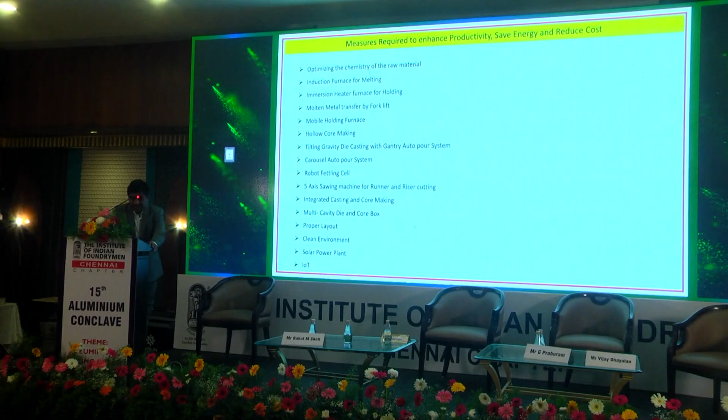These are the essential measures to enhance productivity and save energy. To start with, optimizing the chemistry of the raw material. In the morning session we heard a lot about raw material cost and how to control over that.

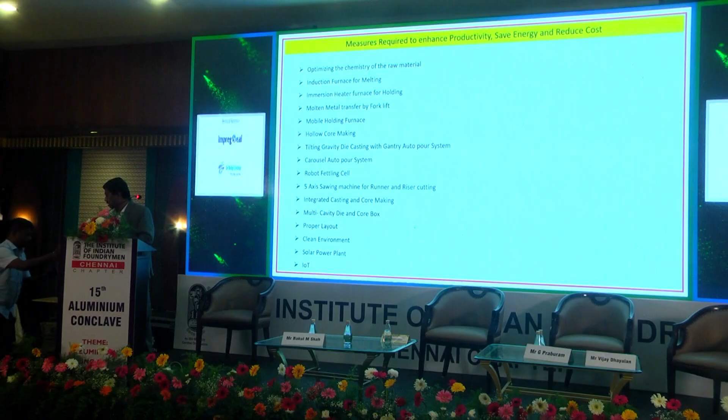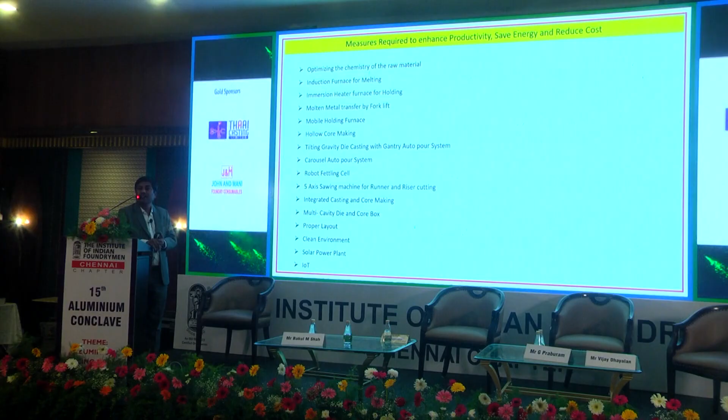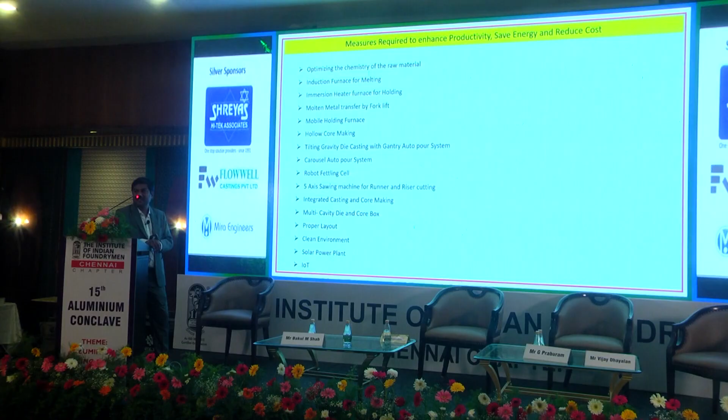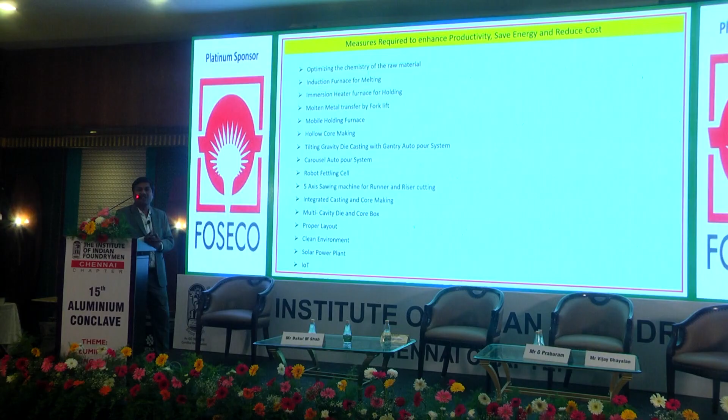So we can do a little bit on controlling the alloy cost. Hope Balu or whoever alloy makers are here will agree to that. Instead of demanding 0.1 iron or 0.2 iron unnecessarily, we can work with additional 0.1 or 0.2 iron content. That will make a big difference in cost, because minimum we can reduce 2 or 3 rupees, or 4 rupees, sometimes depending on the alloy.

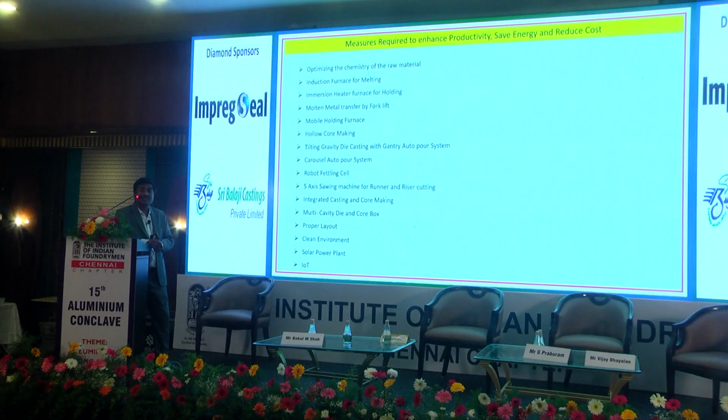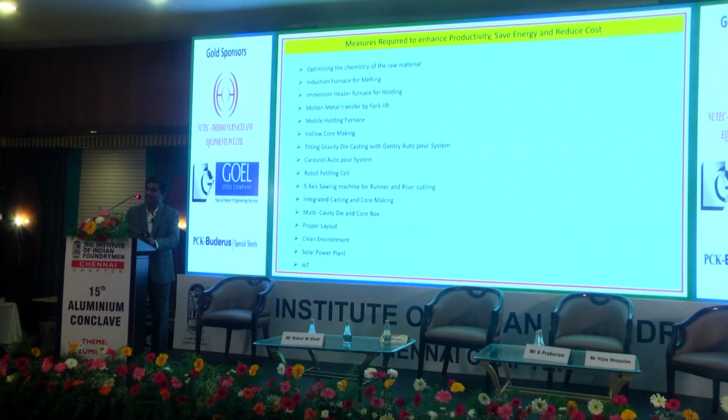So if the casting does not require any leak testing or load bearing strength, we can easily choose and customize the alloy. We can even convince our customers, as long as they get what they want, like the properties or leak proof requirement, then we can easily do that and enjoy the benefit out of it.

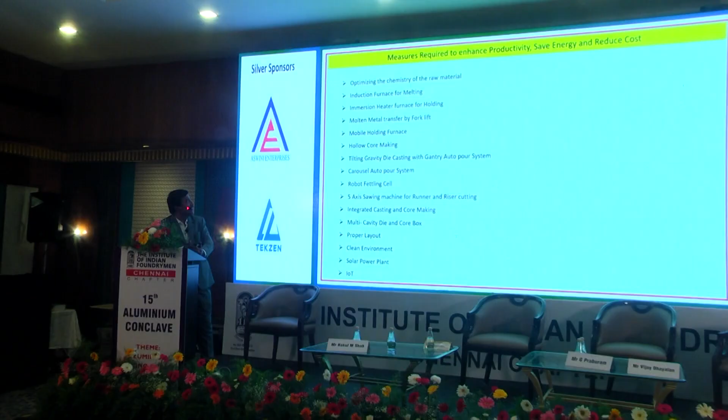Second is induction furnace, immersion heater, molten metal transfer, and we are going to touch these in the coming slides. Hollow core making, tilt gravity.

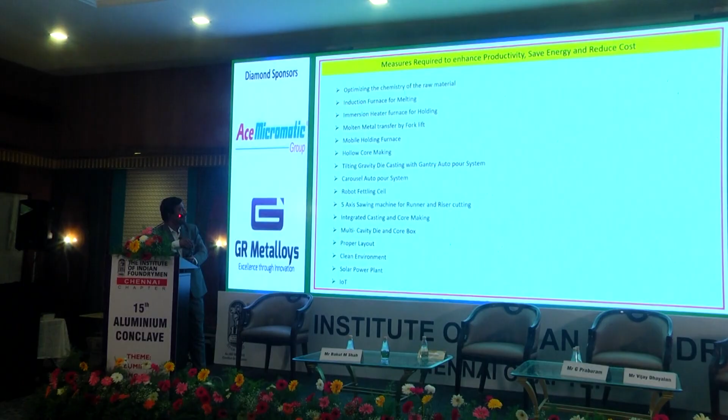First, we should think about eliminating the diesel fired or oil fired furnaces from the foundry. Personally I've been using it for more than 30 years, or 28 years, induction furnace, but considering all issues, initial cost will be little higher, but there's long-term benefit. There are many benefits when we use induction furnace: efficient, clean, safe, eco-friendly, and we can easily get it adopted for Industry 4.0.

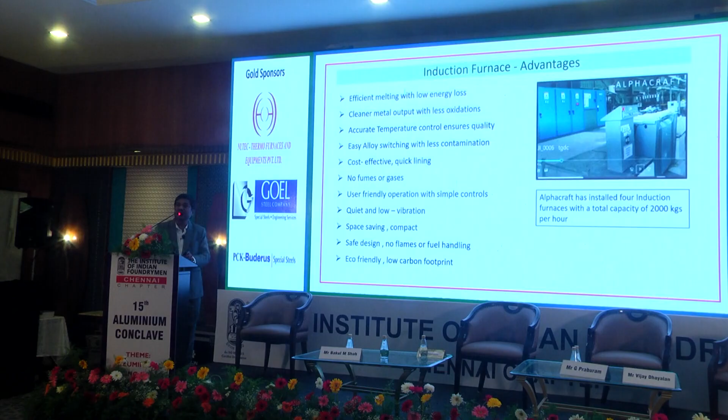We will get a very clean metal with less oxidation. One of the biggest problems causing many defects is unclean metal or the quality of the metal. The quality of the metal contributes around 70 or 80% of the defects.

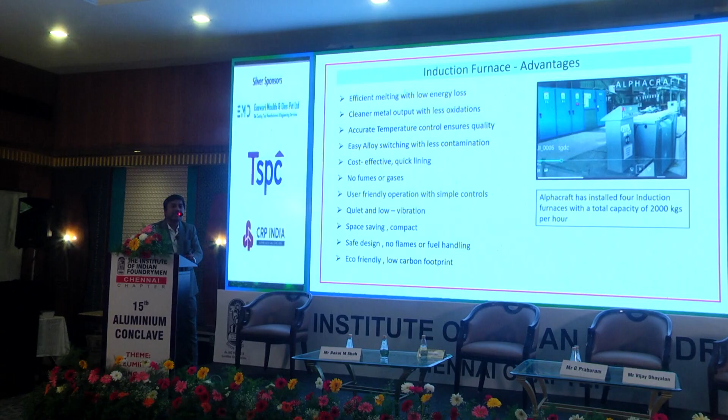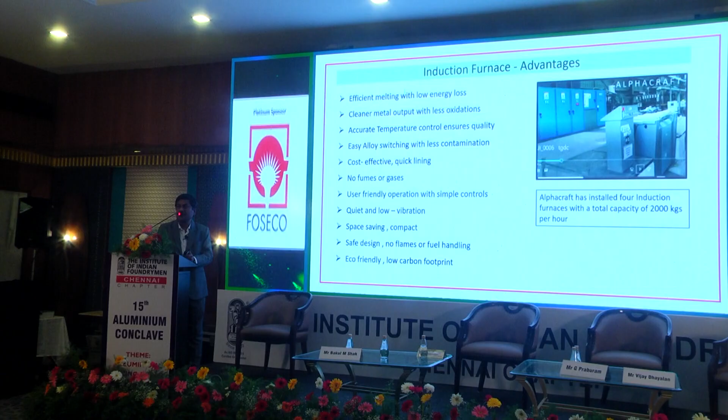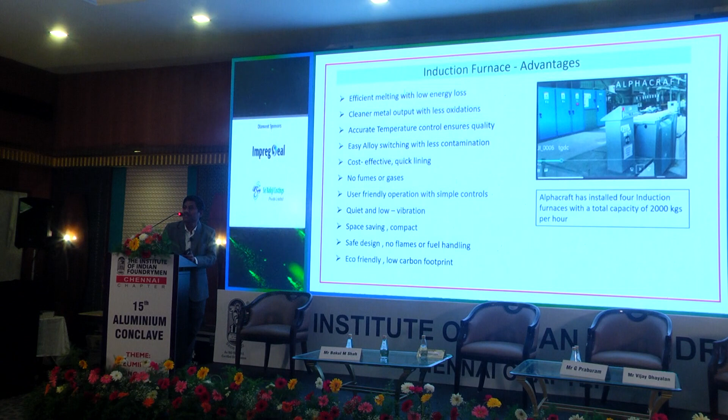When we use the induction furnace, we will have accurate temperature control. Whereas with a tower melting furnace or any other furnace, it's very difficult to change alloy; we'll have to have a furnace for each grade, one furnace for aluminum silicon, and then another furnace for aluminum silicon copper, because we cannot remove the entire metal from the tower melting furnace or other furnace.

Whereas here it is very easy to remove the entire metal. We can tilt and then clean, and then charge whatever grade we want. So the contamination will be very less.

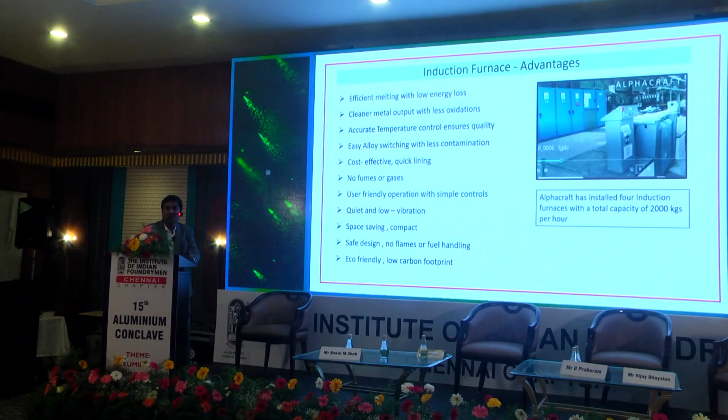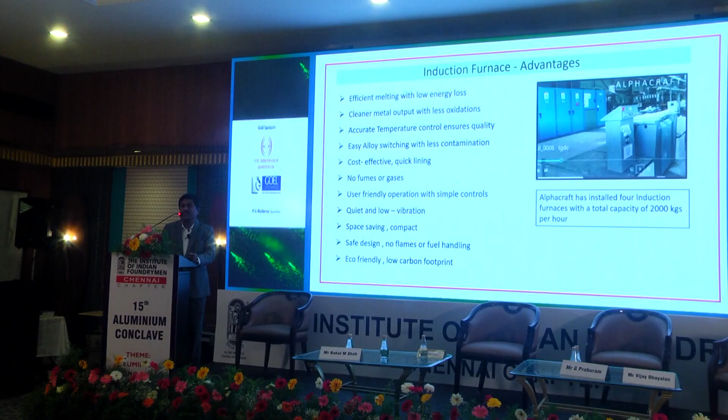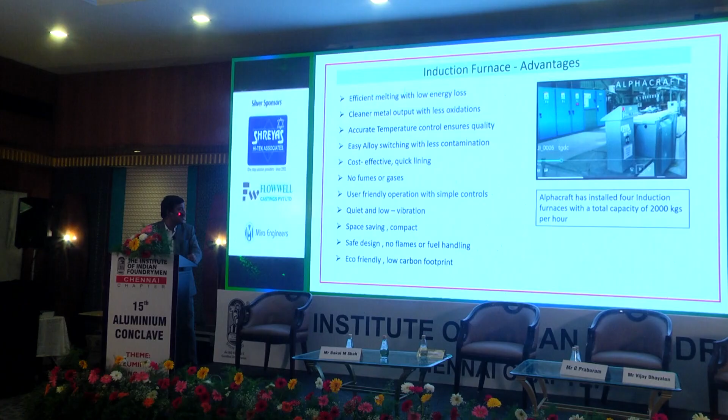If you compare the cost of diesel, furnace oil, or any other LDO, the cost will be less when you use an induction furnace. No gas, you can have a very clean foundry, and it's very user friendly. One of the biggest advantages is even if the furnace is 250 or 350 kilowatts, we can operate at even 10% of the power. When we don't want to tap or increase the temperature, if we have to hold it for some time due to some reasons, we can easily bring down the power and operate it. It's very quiet, low vibration, space saving, no flames, and has a low carbon footprint, which is required.

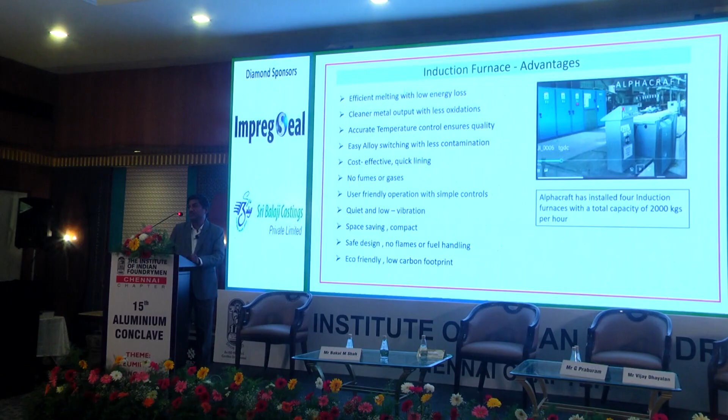In Alphacraft, our company, we have installed 4 induction furnaces, with a total capacity of 2000 kgs per hour.

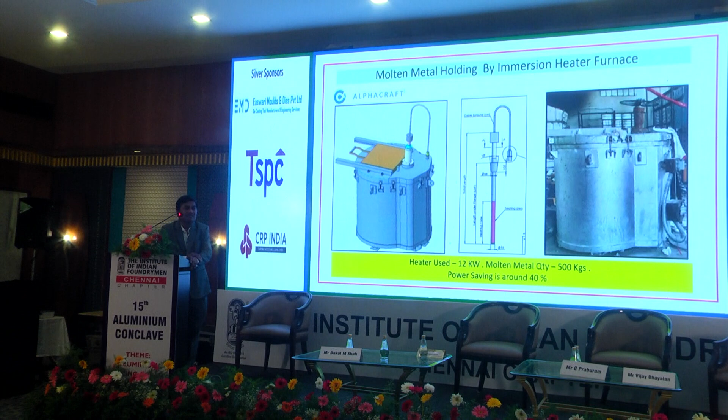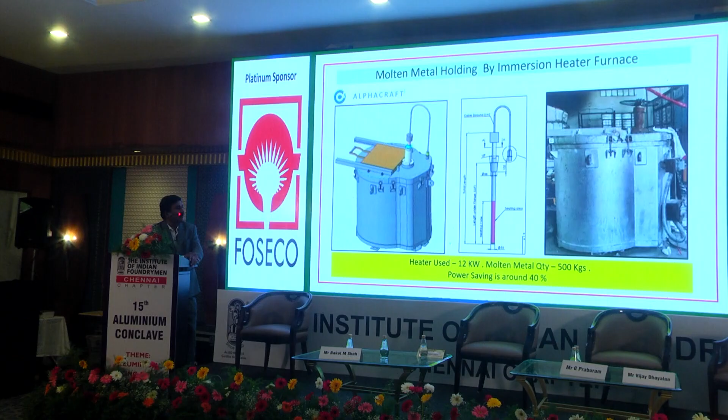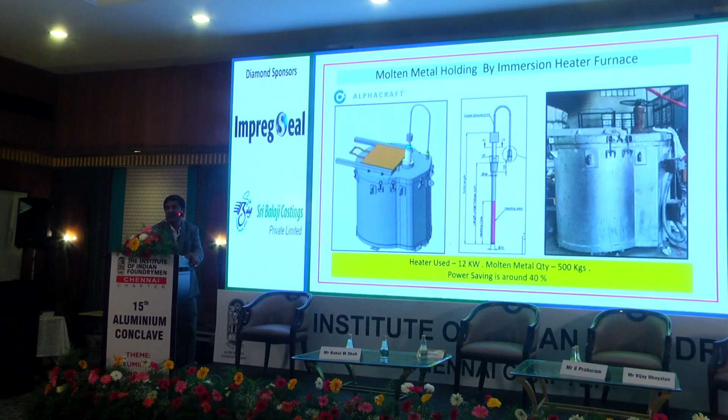We tried with an immersion heater. The picture on the right is the furnace built by us, and we imported an immersion heater from Denmark. We are trying to source it locally—if someone can help us, it would be great. We developed only one so far, and we have 18 furnaces, so we'll have to slowly replace them all with this, and the energy efficiency is quite high. For 500 kg, we require only 12 kilowatts, because there is no crucible—we put the heating element directly inside the molten metal, so the energy loss is very minimal.

So in each slide, I have addressed productivity, cost saving, and energy saving.

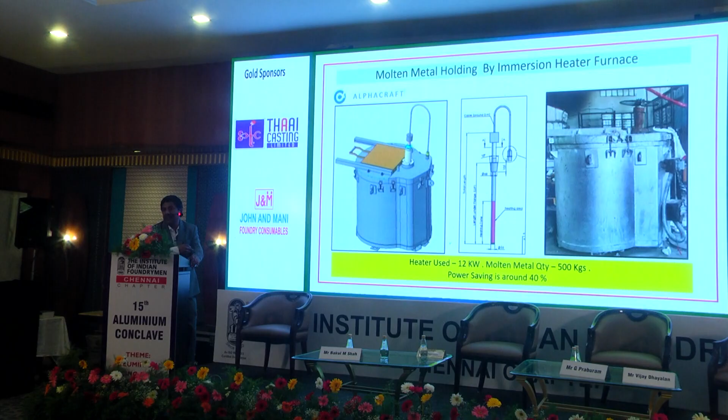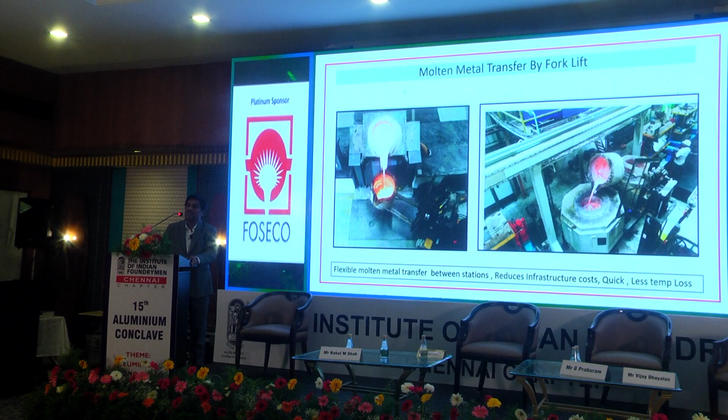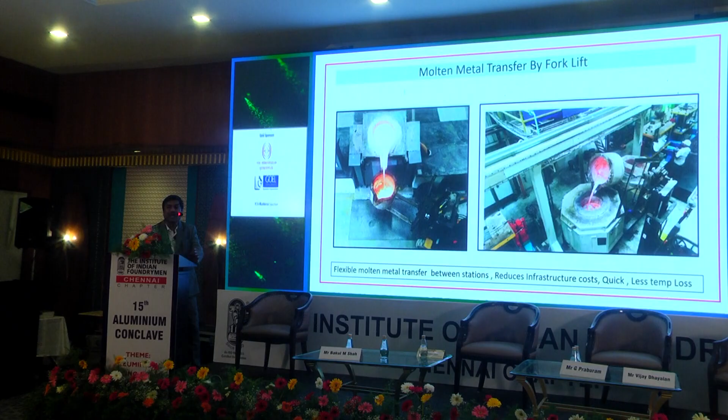For mass production and to achieve productivity, we should try to use a forklift, which is cost effective and saves a lot. You can move from one station to another without much hassle—directly tap molten metal into the ladle and move to your pouring stations, and only one person is required. We don't need to deploy 2 people to transfer molten metal from melting to holding, because you can have a tilting arrangement in the forklift itself.

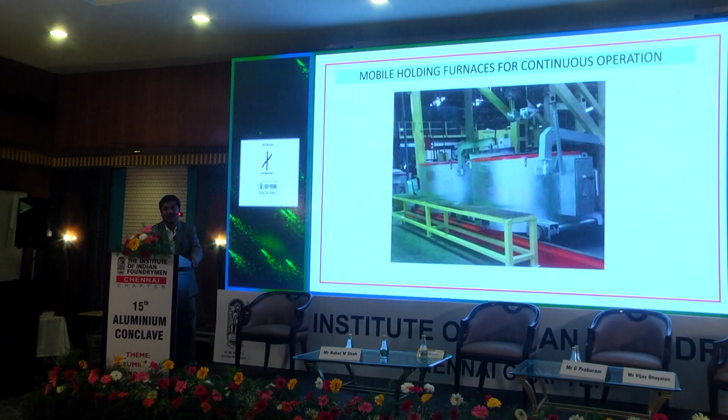For continuous operations, you can build the furnace with wheels, and have 2 furnaces in case you don't want any interruption during production. This furnace was built by Praveen's father, and we deployed it in a carousel auto pouring line—you can move it even by hand or with a motorized one. So production will not get affected at all.

Nowadays we stopped doing all the treatment in the holding furnaces. We treat the metal in the transfer ladle itself and then transfer the treated metal to the holding furnaces. But in case you are forced to do the treatment in the holding furnace, you can have this arrangement, and it will help a lot.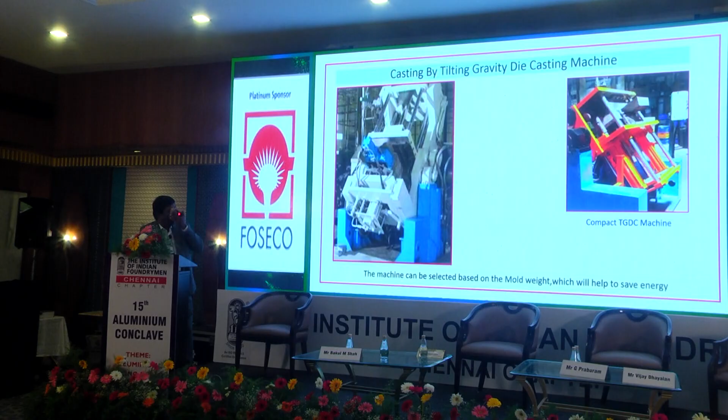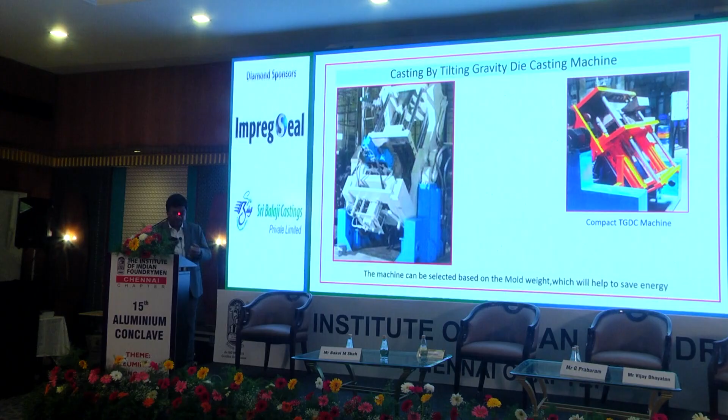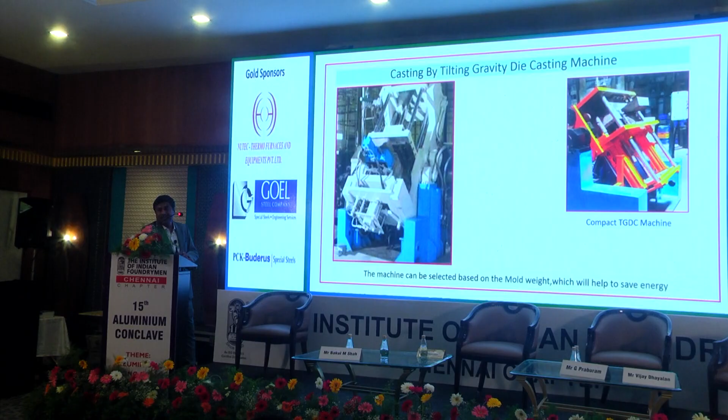When it comes to casting, whoever is using standalone equipment, we can go for a tilting gravity die casting process. There are many machines available in the market, and we can choose accordingly—no need to buy a bigger machine and end up incurring huge power costs. We can choose according to the mold weight and the casting weight.

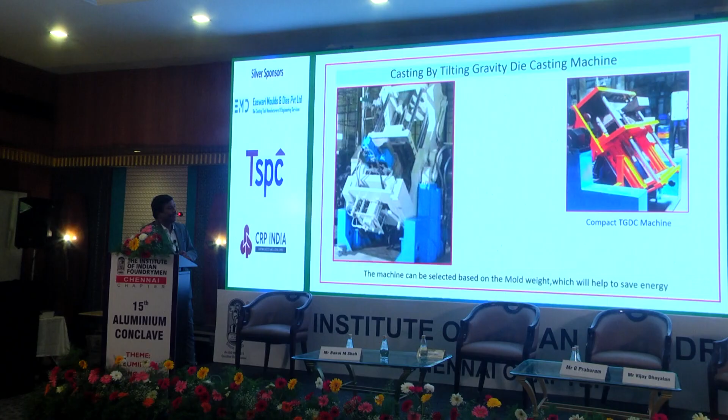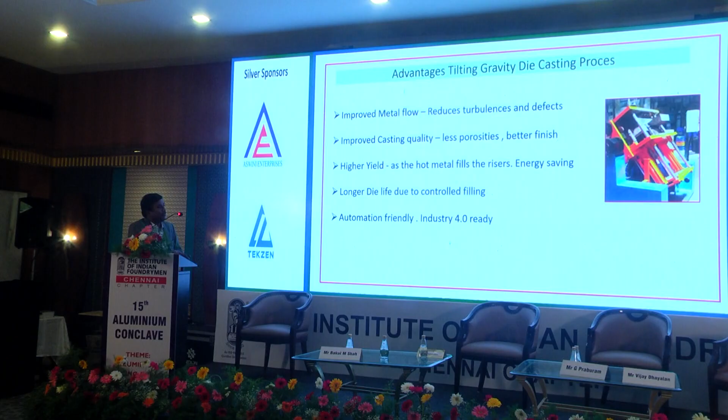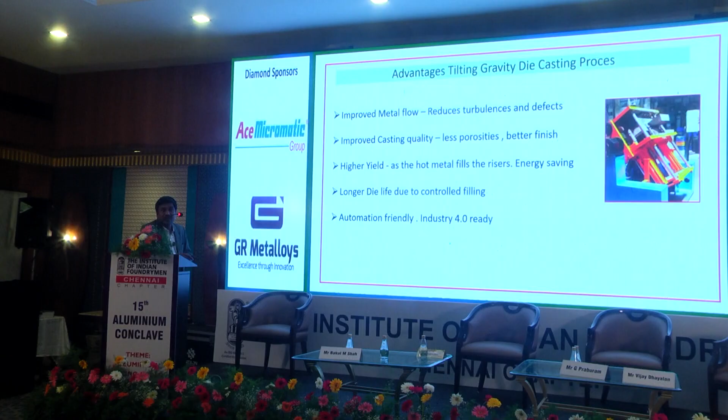See the advantage of the tilting gravity die casting process: improved metal flow, reduced turbulence and defects, improved casting quality, less porosity, better finish, higher yield compared to standalone, and longer die life due to controlled filling. It's automation friendly and can easily connect to IoT.

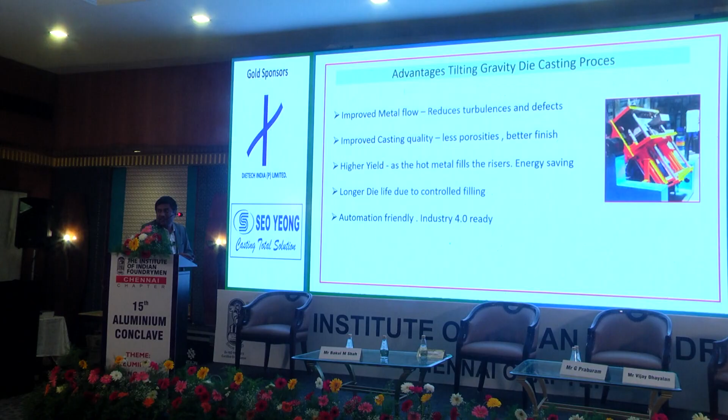So another option for mass production - we'll play a video. We can go for a gantry operation. It's a very low cost automation, and later we move to a fully CNC controlled gantry auto pour system.

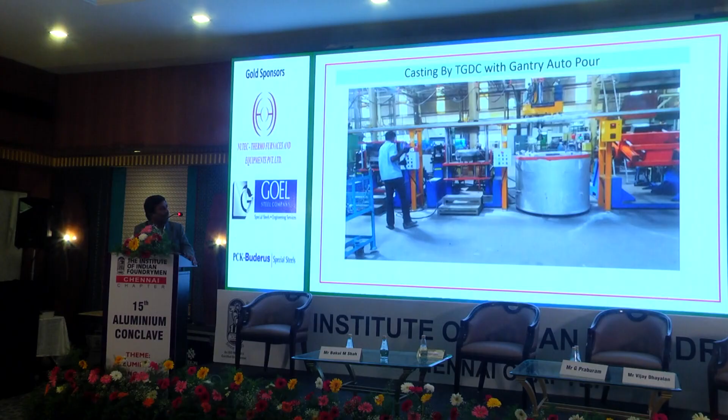By having this setup, we can reduce the manpower requirement. And by having this arrangement, another thing is we can have a common power pack - we don't need an individual power pack for each machine. For the second, third and fourth machines, we designed a common power pack with 2 hydraulic motors and pumps. So the energy saving is again very significant.

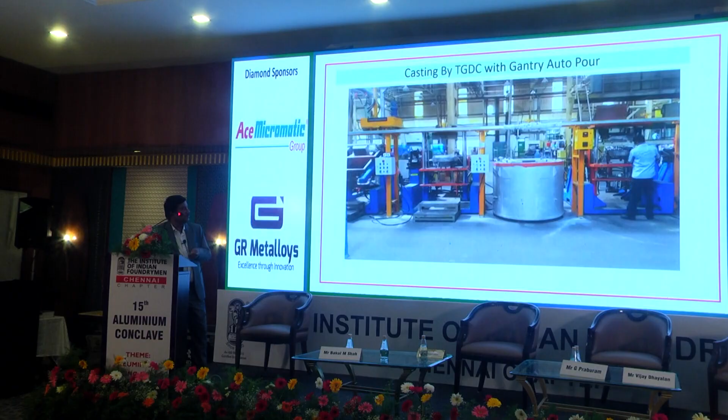This is the latest gantry auto pour system with 2 furnaces in the middle and 4 TGDC machines on either side. Here you can vary the weight of the metal as we like, and we can even handle 2 grades of metal in this same line.

Suppose if we need, for example, one grade like AC4B for the first 2 machines, we can fill that AC4B in the first furnace, and if we want something else like LM6 for the other 2 machines, we can fill the LM6 in the second furnace. The whole gantry movement can be programmed, and the weight is also controllable here.

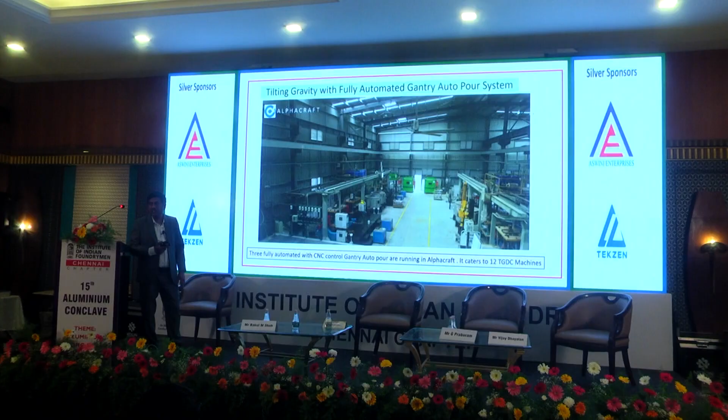So now we have 3 machines like this, and we are operating 12 TGDC machines with multiple cavities. The productivity is very high with non-stop production, and when productivity goes up, automatically the cost comes down, the energy comes down - that's the key.

For all 4 machines, you can see at the top there's only 1 power pack. Earlier, or even now in many places, they used to have a power pack for each machine. For example, the machine size we have is 2 meters wide, which can handle around 3 to 3.5 tons of die, but each requires around 20 or 25 HP.

But what we have done is design only 1 power pack, with 2 motors and 2 pumps. So for maximum demand, when we avail high tension power, we'll have to pay around 560 to 580 rupees per kVA. If we consider 12 machines, in the traditional way we'd need 240 kVA, but here we are managing with just 60 kVA. So 180 kVA of maximum demand charge is directly saved, and energy consumption for each machine has also come down significantly.

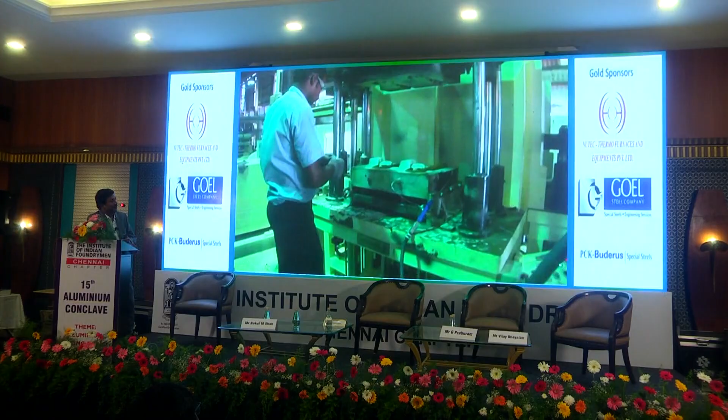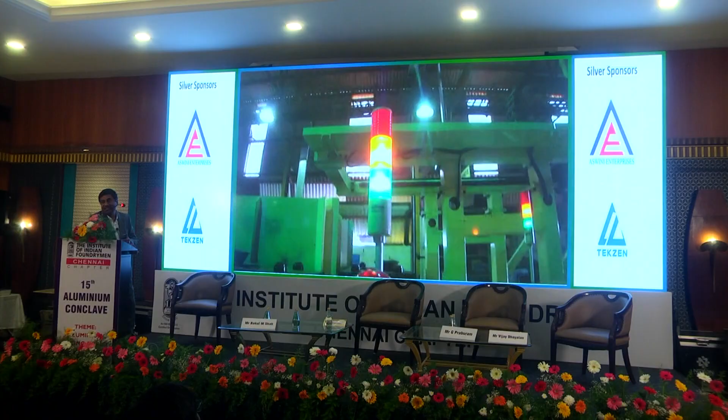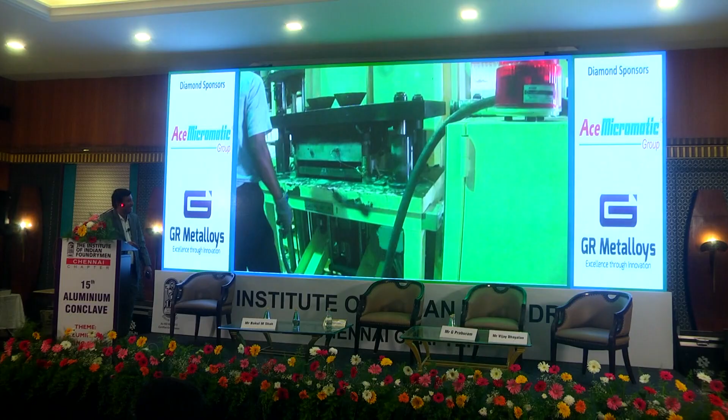I think it's quite difficult to stay focused after lunch, I believe, but I'll try my level best to keep you engaged, because I can see all of your faces, and it's not easy, I accept - but Prabhuram has given me only this slot. Actually, as per request... because I had to come from Coimbatore, I started early in the morning.

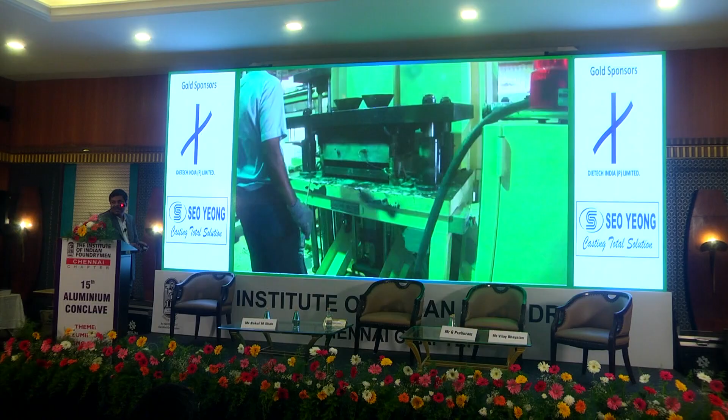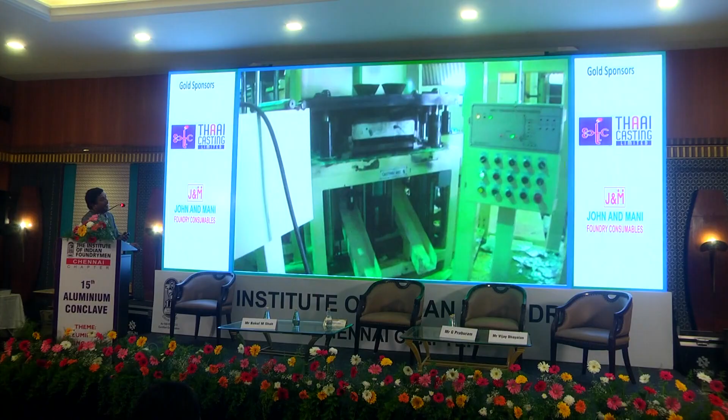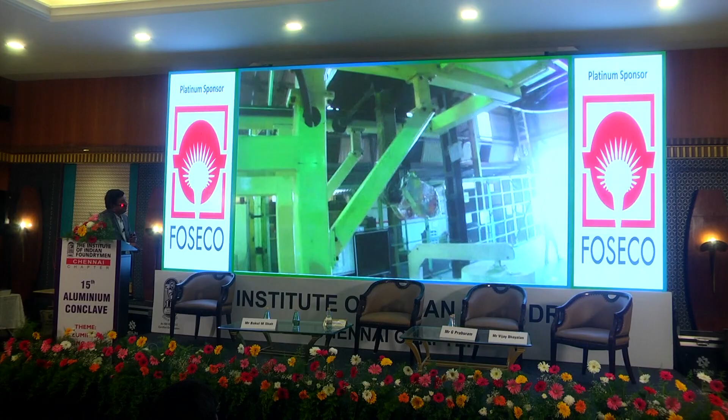So there are 8 cavities, 4 stations and 8 cavities. We need actually only 1 operator, because he has to place the core. Once he places the core and presses a button, it will go to the next station for pouring. The initial stage was done at my previous company, and 2 castings can be poured at a time with a tool cup.

In the initial stage, we replaced this cup with a ceramic cup - we buy it from Prabhuram, who supplies the cup for that. It's stainless steel, but the metal was still sticking on the wall. After replacing it with ceramic, which is a non-wetting type, there were no issues.

It's ideal for mass production. We can produce around, with 2 cavity dies, 4 dies, we are producing around 1500 to 1600 numbers in a day. So we need only 3 people.

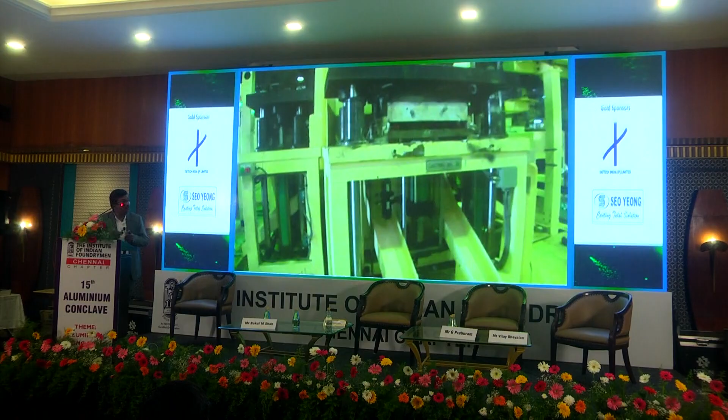We can, no. Because I am testing the patience, so they are waiting for the machines to rotate. So if the laptop is here, then I can scroll it.

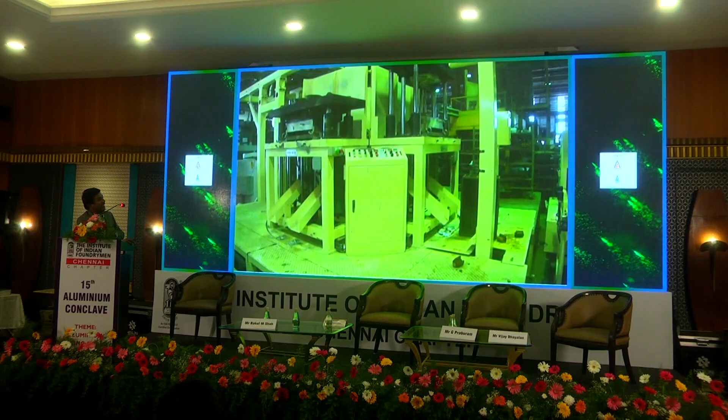So one side the pouring is happening, another side casting extraction.

The timing is programmed. This station is just behind, exactly behind the pouring station.

I think laptop, you are not, I should operate. So, no, show it. Okay. Now,

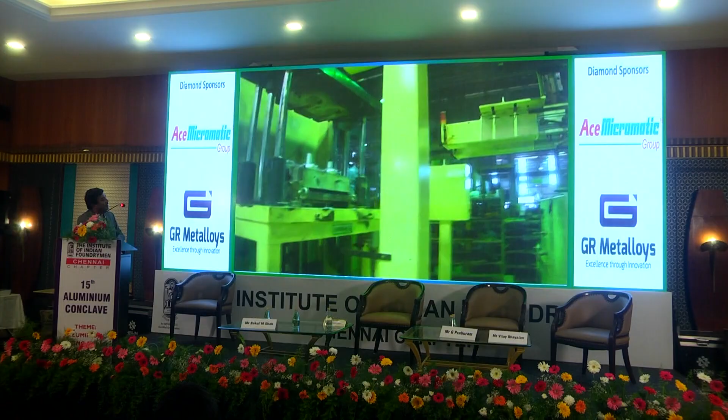Die got open. This is the casting extractor. It is picking 2 castings from the mold.

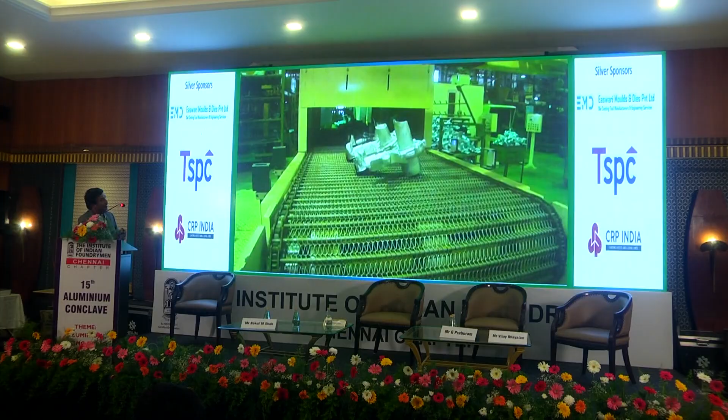And this is the conveyor, cooling conveyor. There is a mist spray inside that, and it drops it in the conveyor. When it reaches the other end, the casting becomes maybe around 40 or 50 degree temperature, and then the operator can take it up for the next operation, for knockout or

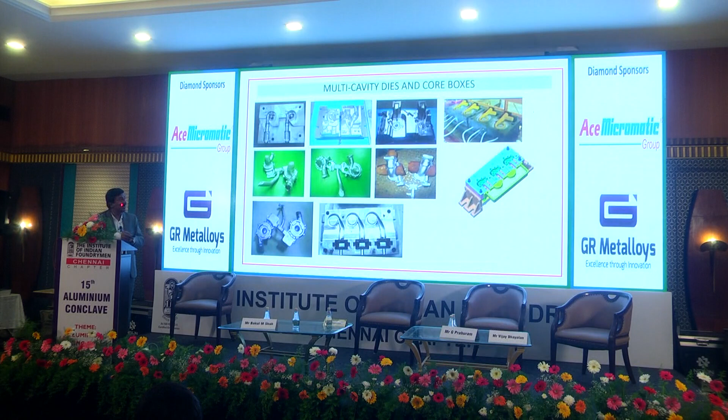highly recommended for mass production. So when we say productivity, we should start developing multi-cavity dies. Even if our customer doesn't pay, we'll have to invest in the tooling and develop a multi-cavity core box or casting die. Because that will fetch a lot, it will help a lot to cut down the cost and increase productivity. So the investment on initial tooling won't be much when compared to the loss or the additional cost that we are going to incur during production throughout the program life.

So we have seen the casting now, the post casting. After casting, again we have to have, wherever possible, we should go for automation.

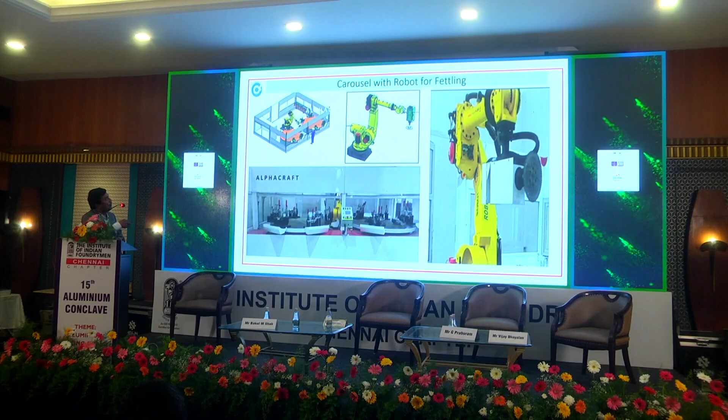So this is on the top, and this is the cell. There is a robot inside, and these two are carousel tables. There are 8 tools, various cutters, circular saw, bar cutter, whatever you want you can store it. The robot will pick from there and then do whatever operations we want.

So why have we gone for 2 tables? Because there is no loading time lost in this system. The operator can load all 6 components in one table. By the time it completes, it can come here and do whatever operations we have prepared. So that's the beauty of this system.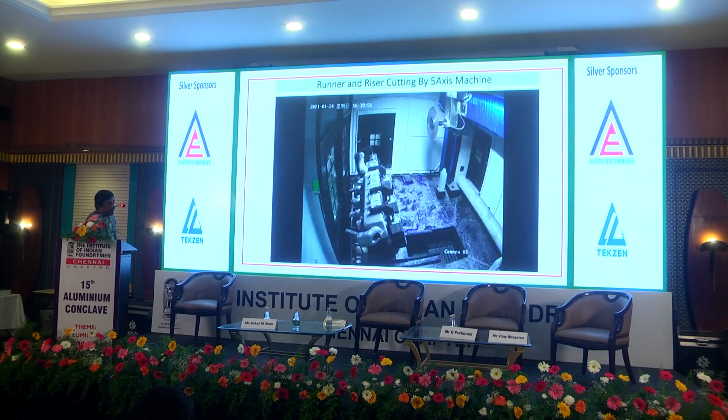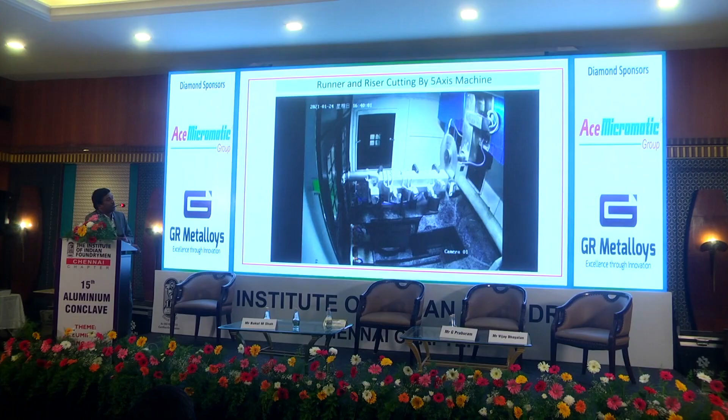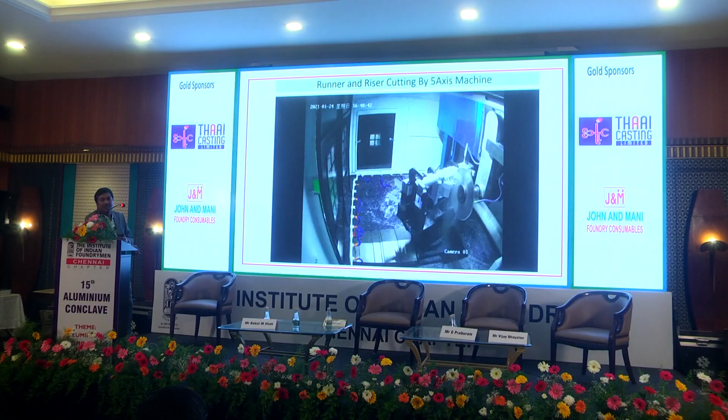Again, for our productivity, in each slide we have addressed productivity and energy saving. It's again a 5-axis runner and riser cutting machine. Normally we use 5-axis machines, costly machines, only for machining, but we should think about using it for foundry cutting and all. It will give a lot of benefits.

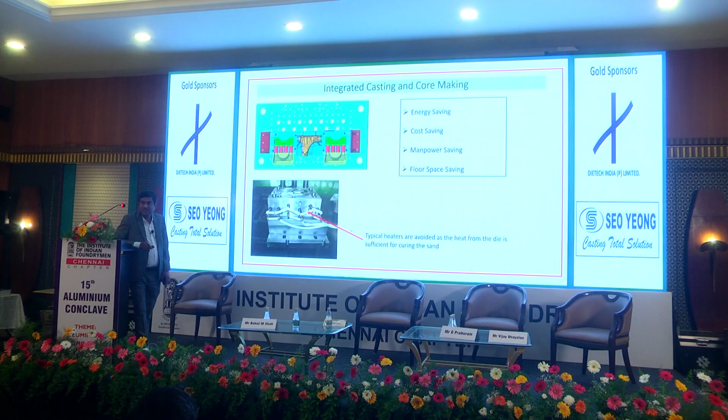Next, again we tried out a new thing to save energy. Now the most important thing is energy in the foundry. So what we did, we developed a mold, a casting mold with a shell core box in the middle.

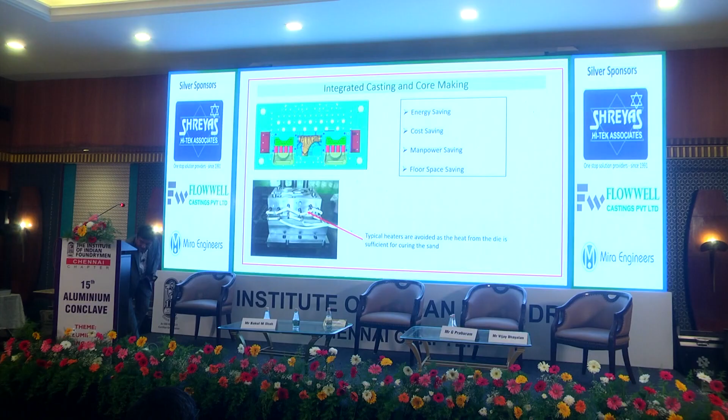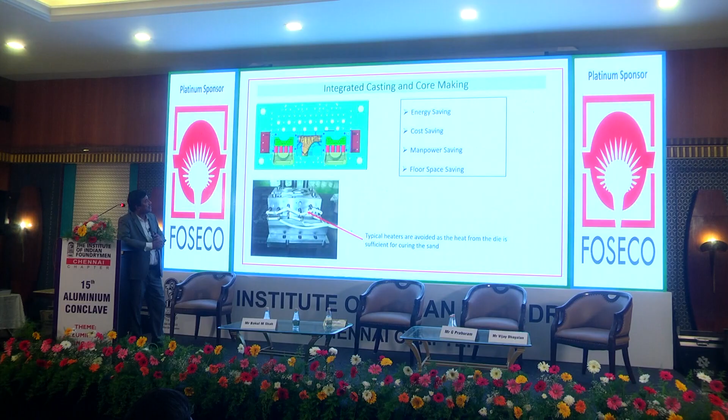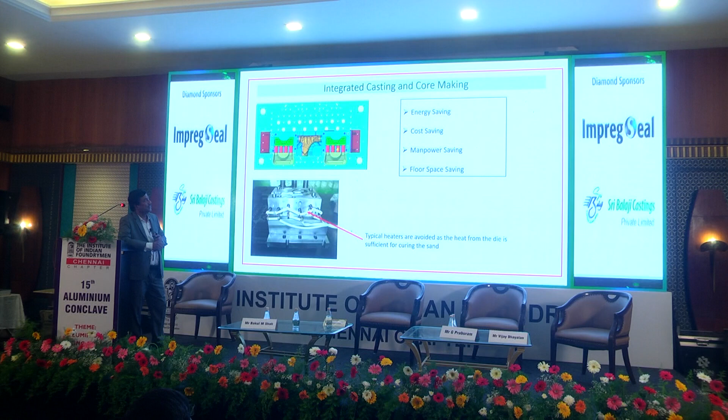You can see at the picture at the top, to your left and right is the casting. It's again a tilting gravity die casting process. In the middle, at the same insert, we created a shell core mold impression. The idea behind it is to make use of the heat, because a lot of heat that the mold emits during solidification is being wasted now, we are not able to utilize it. So what we did, we created this core in the middle, and we make use of that waste energy that comes from there to produce these cores.

So nowadays what we do, we are using these type of heaters. We are inserting them in the core box. Depending upon the core box size, we need a minimum of 8 or 10 heaters per side, and totally we need 16 kilowatts for producing the shell core.

So in this way we can eliminate these heaters, and directly save energy. Not only the energy cost, but the same operator who is producing the casting will be forced to produce the core also.

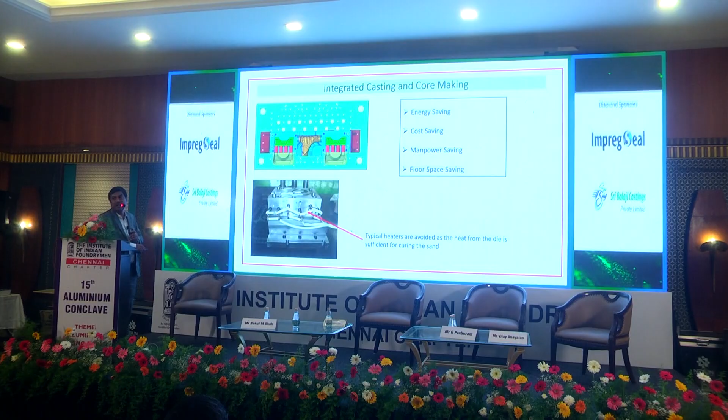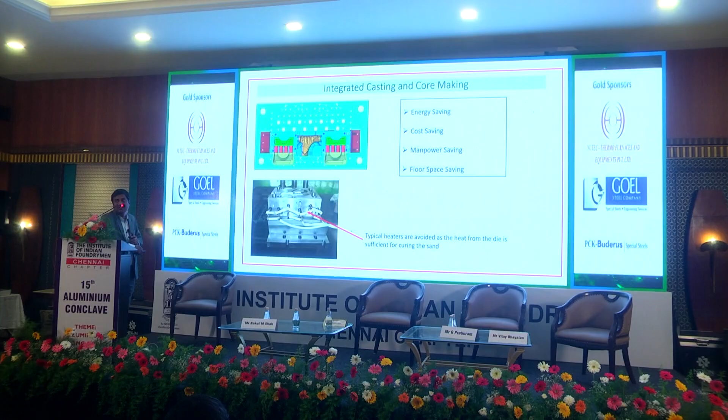So we tried one model, using the same TGDC machines, for which we have to have an arrangement for sand core blowing. With an attachment, you can produce the core also. So there's manpower cost, energy cost, and footprint space saving. When you have an integrated machine, you can save space also, which is very, very important and very costly.

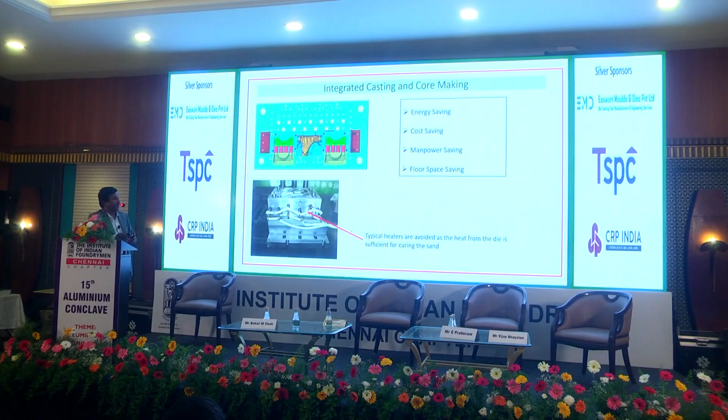Yeah, so by eliminating the fuel-fired furnace and proper layout and automation, we can keep the foundry very clean, even better than a machine shop. So a foundry should not be treated like a kitchen, or an old-fashioned kitchen. We have to have a very clean environment.

I think Prabhakar was mentioning this when he was in the session. So we have to create a very clean environment. We should make the people love the place they work.

This again, the Alphacraft. And layout is also very, very important. The material handling distance should be as minimum as possible. Then we will get the efficiency.

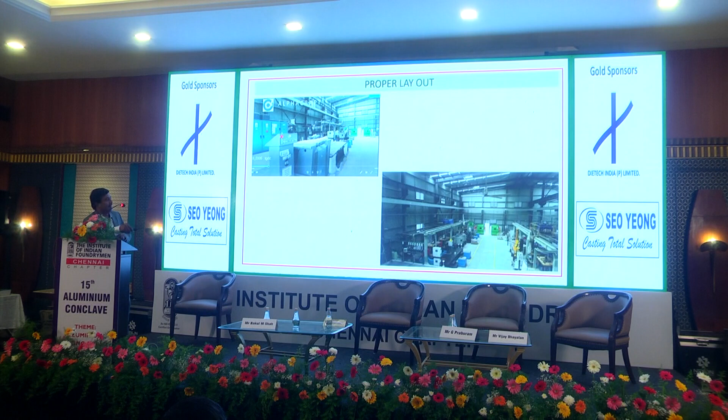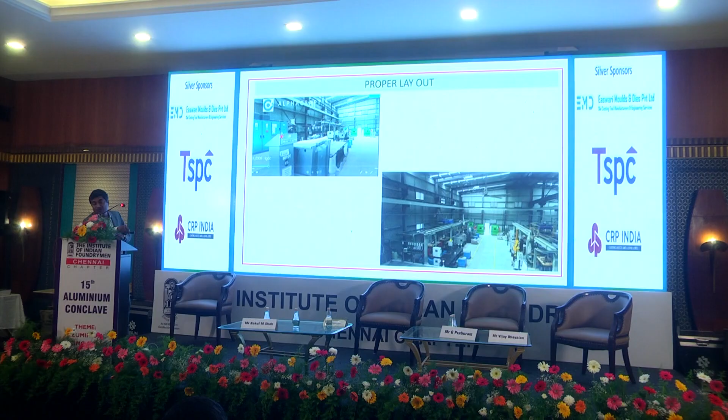So this is the induction furnace. This is the melting furnace. And then there is a casting cell, again a gantry. At the end, after cooling, it goes to the core knockout machine, and I think other pictures are not here. After core knockout, there will be runner riser cutting machines, and then on this side opposite to this, behind this, there are fettling machines, and then behind that, the VMC, the CNC machining center.

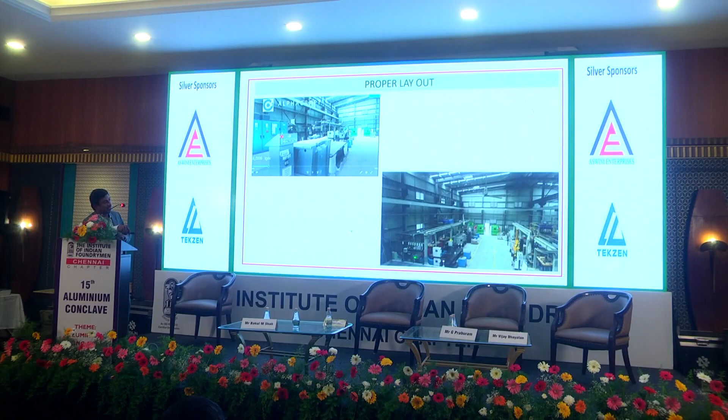So the raw material flows from here. When you say raw material, it's an ingot, and it takes only one U-turn and comes out as FG.

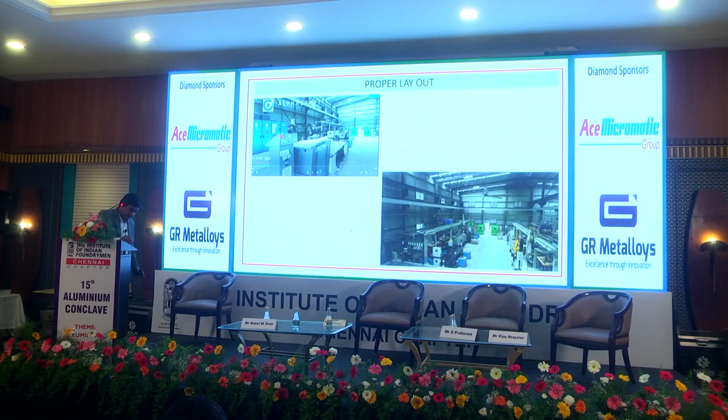And again, it is the GDC facility, Alphacraft GDC facility, where we have deployed all these auto pour and robots and everything. One more new high pressure die casting plant is getting ready. It will become operational in another 2 weeks, where we are going for fully IoT, and it's going to be a digital smart factory. It will be around 500 meters from this same road in Coimbatore.

That's all. So I am open for questions.

I don't know how many of you suffered or how many of you heard, but I made it very short. Even I went out and removed some of the slides and numbers, because otherwise it would feel like watching a movie or something. I edited just an hour or two back, so now I welcome any questions from you. For this nice presentation, thank you, sir.